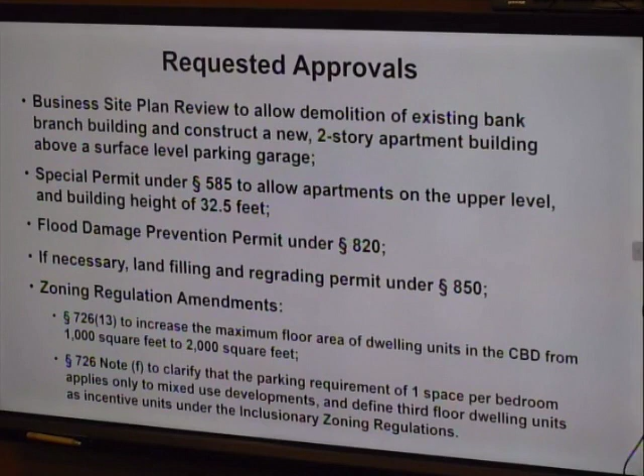But anyway, we're at business site plan review, as Fred mentioned, for the demolition of the existing Bank of America branch. A special permit under Section 585 for the apartments on the upper level, and building height of 32.5 feet, under the incentives available under the Inclusionary Zoning Regulation. A flood damage prevention permit—as Fred mentioned, this site is entirely in flood zone A, but not in the floodway, so we can confirm that. And then, if necessary, a landfilling and regrading permit, but this is a pretty flat lot—there's really no appreciable regrading other than site preparation as necessary for construction.

The two zoning regulation amendments are as follows. One, we increase the maximum apartment size from 1,000 square feet to 2,000 square feet. This was our original request when some units were closer to 2,000 square feet; the largest unit now is about 1,600 square feet, so I don't know if you want to get us to lower that, but we're not proposing any units that are actually 2,000 square feet. Section 726—I'll get into more specifics. There's a clarification here, and I thought this would be a good opportunity to look at the parking requirement, because they've changed, and there's some statutory activity going on with parking in multifamily apartments and transportation zones, things like that.

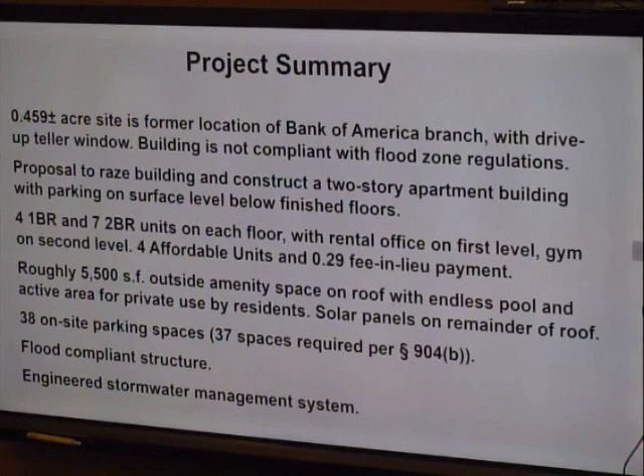And will actually reduce the volume of structure that's sitting in water during a major flood, because the whole under-structure is going to be an open parking area or open garage rather than an enclosed structure. And then obviously we have to do an engineered stormwater management system, which is also here.

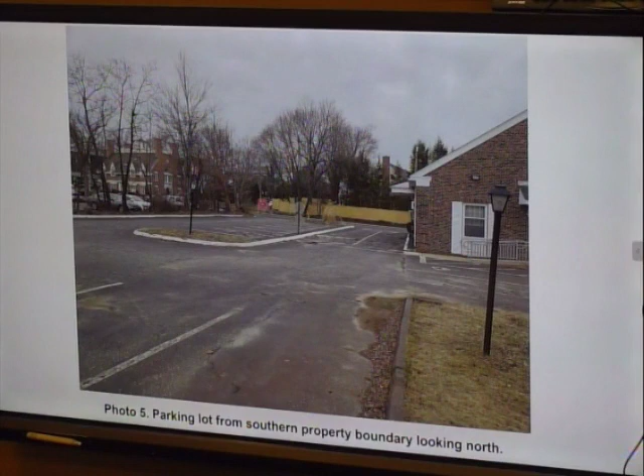Sedgwick is along this wooden, looks like a stockade fence or opaque fence of some sort. Houlihan Lawrence is over here on the left.

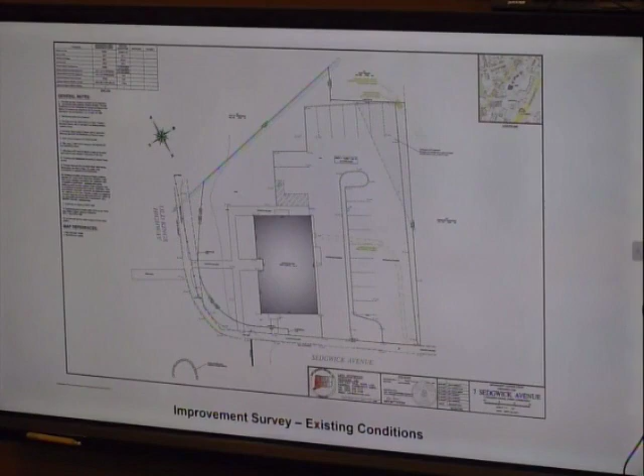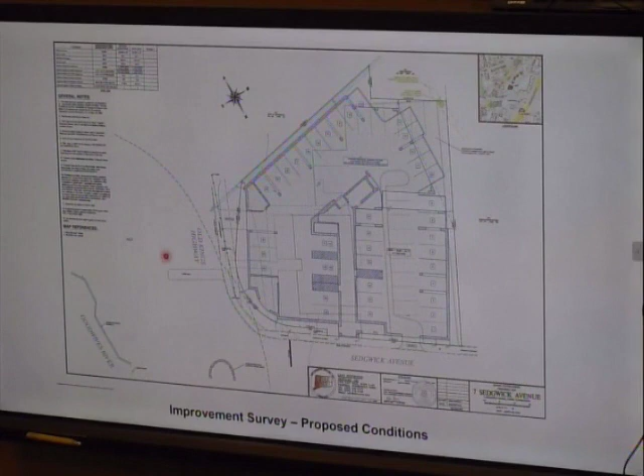Surveys, I'll go through these quickly. We don't have to spend a lot of time on them, but we have the zoning table up here, gives you the current information, and then we go to the next slide - you have the proposed information up here. Everything complies with the setbacks; we're really dealing with special permit issues in this application.

Most of the site is impervious, existing as it is in the proposed. The existing site has no stormwater detention on it, has a few catch basins that directly pass into the town system. We're proposing to capture all of the roof area as well as the small areas of uncovered roof right there - and all of that will be routed into underground detention systems. One that Bob's highlighting there, and then it overflows into a second system before overflowing into the town system. We do have an outlet control structure on there, on the outlet end of that second system, and that will act to control the flow out of the site.

So for all storm events, Darien requires the 2 through the 50-year storm modeled. We're reducing the peak rate for all of those storm events while also providing treatment of the runoff from the site - a fresh meadow approach. Exactly. So the existing conditions are modeled as if this was all grass. We don't take into account any existing impervious, although the reality is that the existing site is predominantly paved.

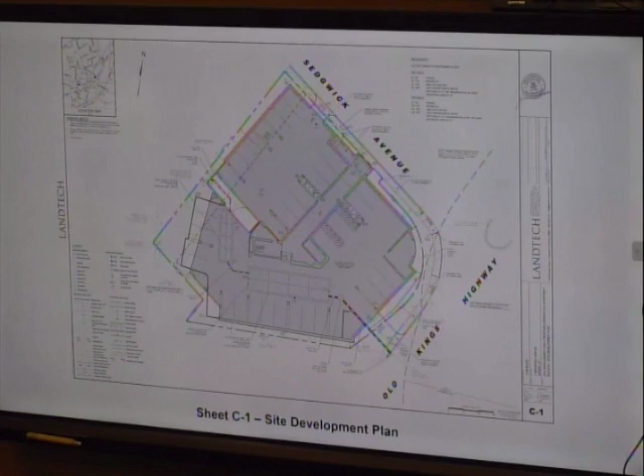We did receive comments, as Bob said, from Joe Canis, many of which pertain to the stormwater, but we've reviewed them and we feel they're all easily addressed. We will address them, have a full report and revised plan accordingly before next hearing.

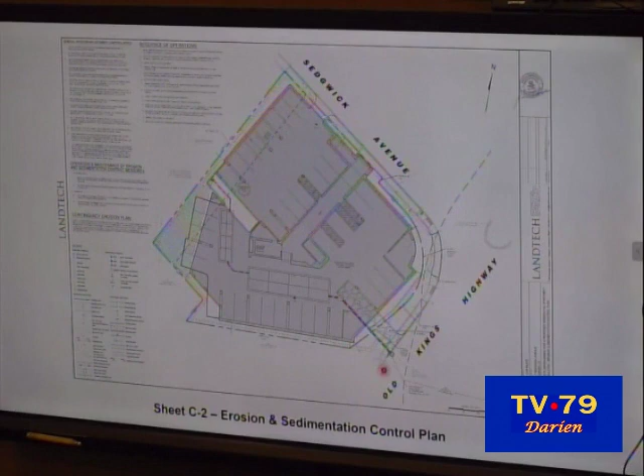Thanks, Bob. Soil erosion - obviously most of the site is taken up by building, so silt fencing will be provided around the entire perimeter of the site. The catch basin on Old Kings Highway that we're proposing to connect to - they'll be putting a temporary silt sack in there that'll prevent any type of material that may make its way off site from getting into the town system.

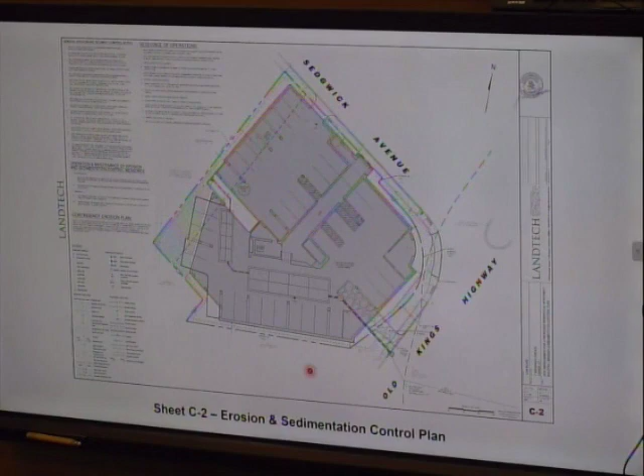Flood-wise, the last thing I want to hit on is the existing building, obviously not FEMA compliant. It's a large mass, removing potential flood storage on the site. Our proposed plan here elevates the solid walls above and provides essentially full flood storage on the property, so in the proposed conditions, there's an increase in flood storage provided as compared to the existing conditions.

What exactly do you mean by that, flood storage on site? So in the event of a flood, as Bob mentioned, the previous building - when the flood comes up and makes its way into the building, that mass of the building, think of the three-dimensional space, is removed, that volume of water that could have been there. Because our building is elevated above that, below is all open - the water can freely pass and equalize in there, thus we're not removing the storage on the site. In your calculations, did you assume there were 0 cars in that space?

Yes, that would be the presumption, but there would be some cars, though it would be a wash. Typically you do modeling for zero cars, since every space is filled with a car that has mass and could be shifted around, forced against walls, displacing water you think you can store and pass through. That may not be the case with 40 cars in there. Typically the analysis is based on solid, permanent walls. In a serious flooding event, cars would likely be evacuated, but the analysis could be done that way. The typical analysis is based on fixed structures like foundational walls, that's the assumption.

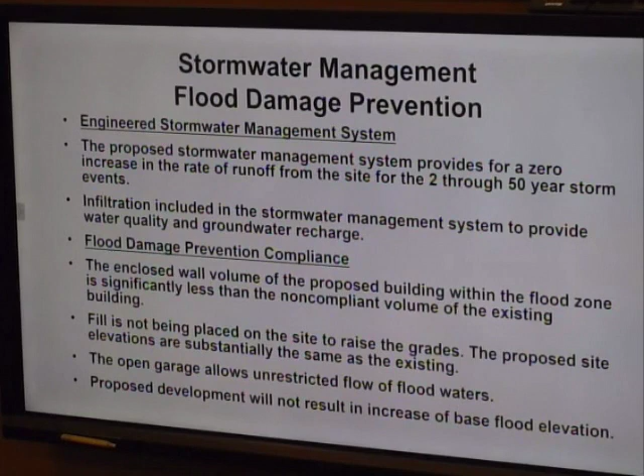You keep calling it a large, massive building, but it's only 2,000 square feet. From a volumetric standpoint, yes, 2,000 square feet, and the rough elevation of the site is 44 and a half, with base flood at 48 and a half. That's a fair bit of flood storage. Looking at the whole area versus our site, that's all we can control - we're providing substantially more flood storage than what's there now. There's none there now, but it's a 2,000 square foot building. He's saying he had to do cross sections - you'd have almost 4 feet of standing water versus just this area for the pylons in a 100-year storm event.

I don't have it here, but do you have the square footage of the lobbies and other enclosed areas? We do have those, but I don't have them on hand. Mark Andre will be following up and can provide that, or we can provide it after tonight's hearing. That's going to be a net - you have at least 500 square feet. The lobby areas, because we're providing flood venting to meet FEMA compliance, when floodwaters come in those lobbies will fill. You'll lose some space for the thickness of the walls, but the lobby itself won't be a full mass taken out of flood storage. Same goes for other enclosed areas below base flood elevation. So there's flood vents in the lobbies and staircases? Yes, all enclosed areas need to meet the flood opening requirement.

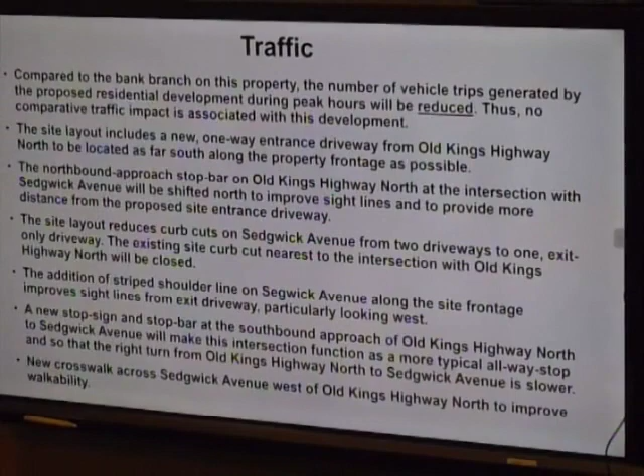Next, I'm going to go through some of the other things we looked at. As you've seen on the site plan, there's going to be one entrance and one exit. The proposed entrance is proposed to be from Old Kings Highway North, and we're locating the entrance driveway as far south along the site frontage as possible, really as far away from the circle intersection at Sedgwick as possible.

We also looked at some common sense improvements that would make sense directly off-site adjacent. One thing we looked at is potentially moving the stop bar on the northbound approach of Old Kings Highway North at Sedgwick, moving it a bit north, which will move it further away from the proposed entrance driveway. That'll also benefit visibility at the intersection, because that northbound approach would simply be closer to the intersection to see eastbound and southbound approaching vehicles at Sedgwick. So we thought that made sense.

Back to the access, the site egress is proposed to be at Sedgwick Avenue. In fact, we're actually going to be reducing the number of curb cuts at Sedgwick from 2 to 1, which is an improvement.

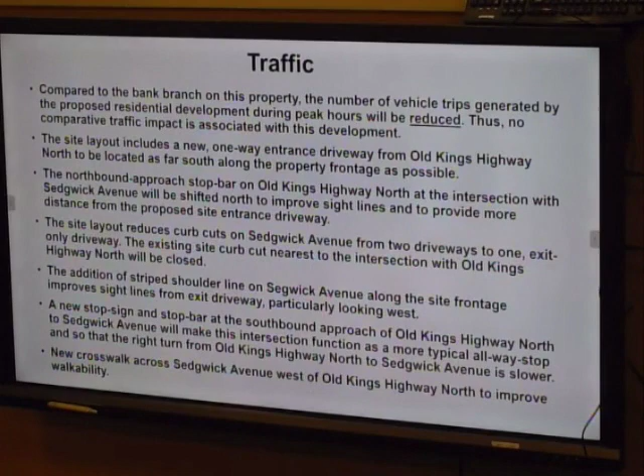Tied to that, one thing we're proposing on Sedgwick is to stripe shoulder lines on that block of Sedgwick. I'll show an image of this in a second. That'll have the benefit of better delineating the travel ways on Sedgwick, moving regular vehicle traffic a bit further away from the sidewalk, and also helping the site egress as well.

It'll essentially create, on the south side as you see right here, a 5-foot shoulder, so that a car right up against the curb won't be traveling there. And for motorists exiting our site, they'll be able to edge out a bit more to better see approaching traffic and egress from the site, turning left or right out of the site.

So they enter in off of Old Kings Highway and exit out of Sedgwick? Correct, one-way flow. Within the site, you'll be able to— just want to make sure I'm interpreting it correctly. Can you exit both directions onto Old Kings Highway and go right into the municipal parking lot like you can now? No, you cannot exit that way. It'll be one way in from Old Kings Highway and one way out to Sedgwick.

We're also proposing a couple striping and signage things at the intersection there at the circle. Proposing to put in a stop bar at the southbound approach, which we think makes sense, really to slow down vehicles so they don't make that southbound right turn whipping around the corner, and to allow the intersection to function more as a typical all-way stop-controlled operation.

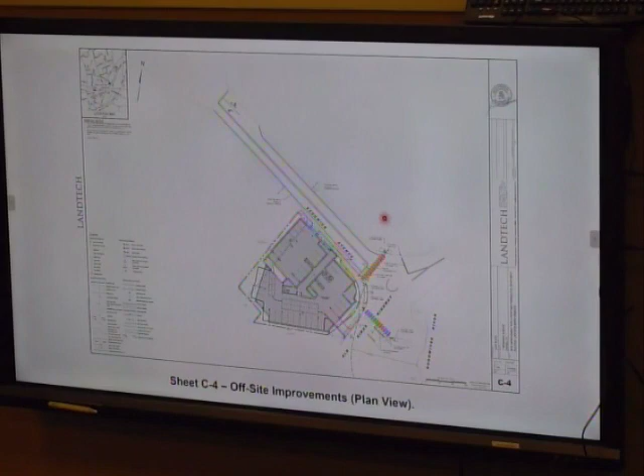Before you move on, let's ask you a couple questions. Coming out onto Sedgwick, I can go left and right, so I'm crossing the double line. You could take a left or right out of the site to Sedgwick. Is it safe to go out and make a left and cross a double line?

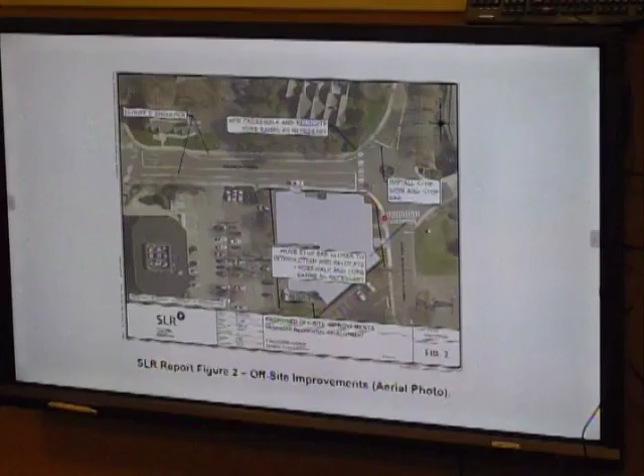Isn't there two ways there, right? The driveway will be one way. Sedgwick is the two-way street. The double yellow line in the middle of the street is what I'm talking about. Just like any other curb cut, you could take a left across the double yellow center line.

But I'm asking if it's safe. Traveling in a vehicle, I never use the word safe, but we look at things like sight lines. What we're trying to do is, to take a left, you're going to be looking to the left and the right in order to cross or enter both lanes of traffic. So looking right, another benefit of adding a stop bar and stop sign on that southbound approach is so that approaching vehicles will be slowed, in essence.

So you're looking out of the driveway to the right, to the circle. You can only see as far as the circle. So the other end of the equation is you want to slow approaching traffic, and that stop bar helps to do that. Looking to the left, we're maxing that out towards the signal, and by putting in a shoulder there, someone exiting the site will be able to better creep out, essentially edge out to a point where they can better adequately see approaching traffic, where you cannot necessarily do that without the shoulder, because there could be cars traveling right up along the curb line.

I've just never heard a traffic engineer call it creep out of the property. Creep out, edge out, it's not a technical term, but you know what I mean. That's the new one. Now I don't know if I answered your question.

Going in on Sedgwick, going in on Old Kings Highway, you got traffic coming in from both directions, right? From the north and from the south? Because it goes one way after that? Now tell me about that, because you have 40 or 38 parking spaces in there.

Well, it would function like any other driveway. Cars could take a left or a right in. There's stop signs here, every here, stop bar. There's another one back here, to our south.

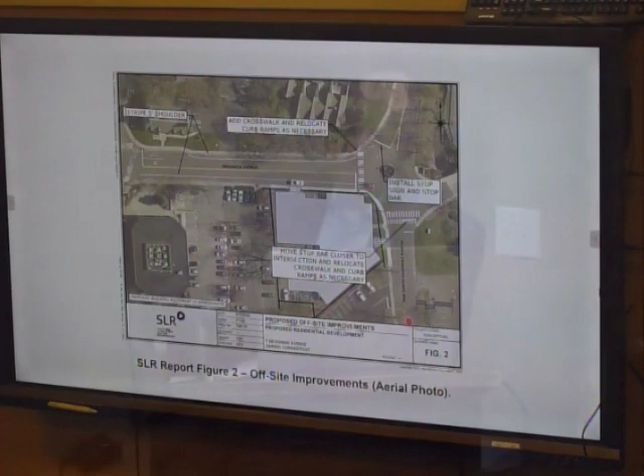But that doesn't really necessarily affect our driveway ingress. I don't know what else to say. I mean, putting in a stop bar at the circle intersection will again help stop and slow southbound traffic. Approaching traffic going southbound will stop, then have to maneuver around the circle as they do now, which naturally slows traffic.

Eastbound traffic has a stop. They'll have to take a right turn. That's not going to be a fast speed, and if you want to enter the site, you just enter it right there. The fast speed's going to be the people that are going from the Post Road to Goodwives Shopping Center. That's where I drive fast.

And then you got a guy coming out making a left. How many parking spaces were in the old bank branch? Part of the problem I have is the bank branch that was there has been closed for at least 4 years. So you're referring back to something that is not even a use anymore. It's not even grandfathered, it's been there, empty. So another bank couldn't go back in there? No. That was one of my questions: in your analysis, what was your baseline usage on the existing site?

Which is nothing. In reality, you might say I pulled bank data and typical bank traffic has inflows and outflows of X, but in reality, what has been there has been zero. So I guess that's what you're hearing from Steve. A bank could not go back as of right, so to speak. So the level of crashes or traffic that people feel now is currently at an operation zero level on that site, where in your analysis, I'm sure you rightfully thought it had bank operations of X level of inflows and outflows, and it did in the past.

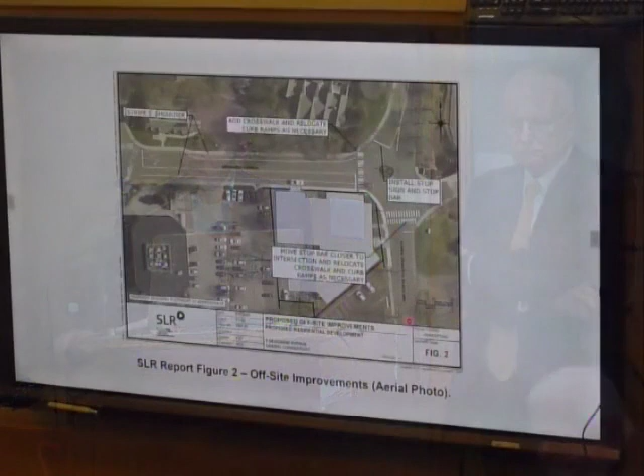Do you have any other signage or anything on that road to let motorists know that oncoming traffic might be approaching? I'm not sure I follow, what do you mean oncoming traffic is coming in their face, where are we talking about? Just before your entrance to your parking, on Old Kings Highway North. Old Kings Highway North is one-way traffic right now. And essentially because that lot south of it - it's not the Mechanic Street lot, it's one way.

Part of it changes from one-way to two-way via the curb cut. But because nobody's there, it's essentially just a one-way street, so motorists don't expect traffic to come at them head-on. It's one-way southbound here, heading northbound, then it turns two-way. So the one-way southbound traffic has to take a right here, but they're not aligned with the northbound traffic because of this bump out. You might see a headlight, but that shouldn't be unusual if you're driving around a downtown area.

Right now, that would be unusual. It would be weird - a motorist right now would not anticipate it. How is that not unusual when it's existing? Because nobody drives that way. When did you visit? How could you say there's a lot of traffic when nobody drives that way? It's one-way going the other way, one-way northbound.

When did you observe this? What day did you visit the site? I've been out there several times, last week and this afternoon as well. Was the traffic count done? We didn't do existing traffic counts because this is expected to be a less intense development than the prior use.

There was no prior use comment. There was a bank, about 4 years ago - not that long ago. I thought there was a count on the Friday after Thanksgiving during COVID. That was from the first application? That's what the remarks I saw indicated - I think we might have looked at existing state traffic monitoring data.

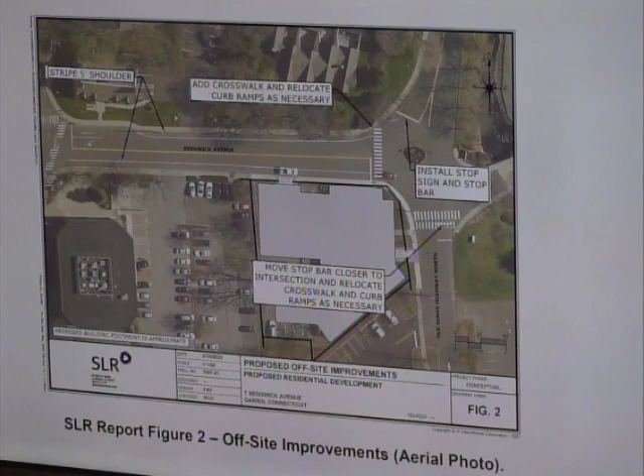So right now there's no loading spot for me when I move into the building, correct? On site, correct, I don't believe so. And there's no spot for an Amazon truck, FedEx truck, or UPS truck to go to. What's the height of the parking garage? Can an Amazon truck or FedEx truck come inside the building? The architect will look at that. We don't even know if a truck can fit in the building.

I don't want to speak out of turn, but I think it depends on the height of it. 8 feet height, so obviously a box truck is not going to fit under the first floor. Okay, so where are you thinking they're gonna park?

We got to talk about that, they seem to have a way of pulling up alongside the curb no matter where they are. I'm not gonna let you design something that's illegal. It doesn't mean it's illegal, it's just the way they do it. We rerouted Maplewood to do it specifically for that one specific reason.

You were the lawyer on Palmer's. There's a parking loading dock on Heights Road. We redid it, yeah, it's not there anymore. Don't deny it, you were the lawyer that represented them. That's a whole different project, mixed use, much bigger. It still had it on the street, and we said no, and they moved it.

You knew this question was coming. Is this your first round of answers? We're just getting to the hearing. We saw the same thing 3 years ago, comments from the peer reviewers on this. No, we saw it as a pre-application 3 years ago, before they went to ARB.

This fixture, it's very, very low level lighting. I wanted it to spill a little bit onto the sidewalk. It's downward pointing, 3000 K, so it's got a warm tone to it. Typically don't use this fixture that often unless I want something just very low with no spillage out to the road or beyond that.

I think that's it, if there's any questions. I would like to just get, I know David and Genevieve are trying to probably get a survey of what the trees are that are coming out.

Sure. Because I'm looking at the survey that we have from the property that was done by Land Surveying Services, the trees don't show up on here. And then on yours, it doesn't show up either. I could show them on my plan and then highlight them.

Usually we put a circle on them and an X on it, so this one's going down, but it'd probably be like a dark blue, so they would show up. Okay, yeah. Because just looking at the aerial, there's 3 or 4 along Old Kings Highway.

And then what do you do with the ones between you and 800 Post Road, over here? Are they coming out? Or are you replacing yours? No, they would stay. Those aren't ours, so those would stay in place.

So you're putting your bushes underneath their trees? Yeah, the existing curb is almost at the edge of the sidewalk, right through here. Right, and they've got trees along. In the back, yes.

So imagine that when this sidewalk goes in, there'll be some disturbance. We just want to make sure that we fill in that gap. Okay, so you're not going to kill their trees, are you?

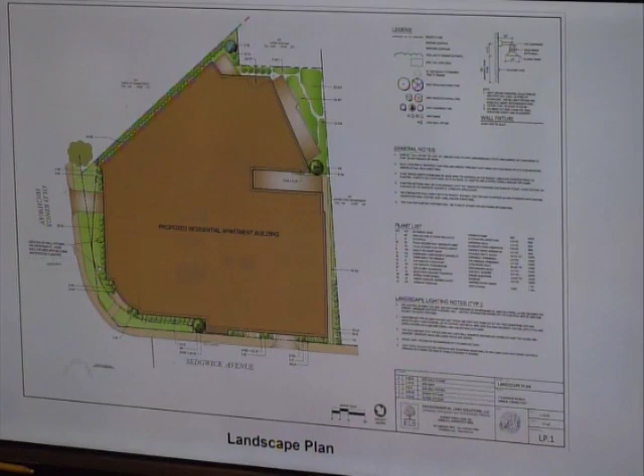No, again, we're only putting in just a sidewalk right in that area, and the asphalt line goes almost right up to the edge of the sidewalk here. So we're only really disturbing our asphalt area.

But so you're putting your bushes underneath their trees, so they're going to be shaded, right? Yeah, but they'll survive those right there. Again, they're not that tall.

Okay, yeah, they're on. I mean, you've been here 1,000 times, Matt. It's, yeah, I kind of trust you, but we could check you on that.

You're looking at two different things. You're putting brand new bushes underneath existing trees. But they're not, they go in at 3 feet high, I think, so they're not large trees that we're putting in underneath the existing trees.

So, but we'll look into that, and I do have those trees that are off-site on the survey. I'm looking at one that shows those. Not your survey, right? A different survey? The only one you have on here, I don't know, you're keeping it.

I have an old survey that's in the file, but I'm looking at, and I'll make sure those trees are on. So it shows maybe like 7 or 8 trees from here back through here.

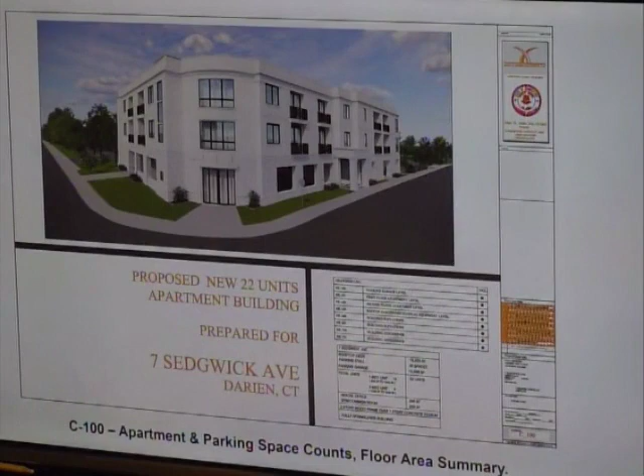From this lobby, you can either use the elevator or the staircase, and that will take you to the upper floors. At the ground level, or the parking garage level, we have one enclosed area here with the staircases and elevator lobby areas. Elevators per FEMA will have a float switch, so during a flood event, the elevator cab will not go down below the base flood elevation.

Do you have hydraulic elevators? We haven't made any decision yet on what kind of elevator will be installed. But regardless, it's an electronic switch, so basically in the pit, if it floods, that switch will prevent the elevator — if you call it, it will not go down. Right, it kills it essentially. So you don't know if it's hydraulic or electric? We haven't selected what kind of elevator yet.

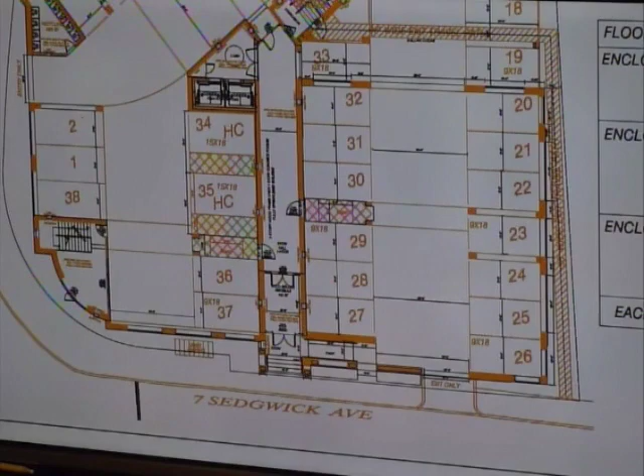Can you help me with the laser pointer so we can zoom in on this little area? Okay, this little pocket here, these were all the mailboxes for all the units, built in. We're talking about the mailboxes.

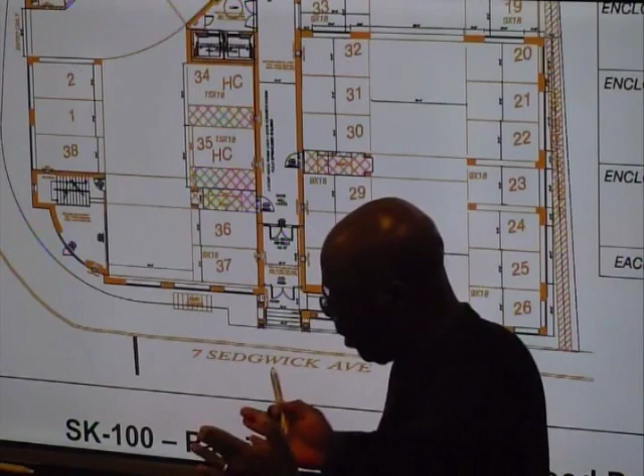Steps, ramp coming up. This pocket here, these are the mailboxes. They're built into the wall, outside in the elements. So if you stand in here, you're outside. So presumably Amazon will drop the packages right there, where the mailboxes are, right?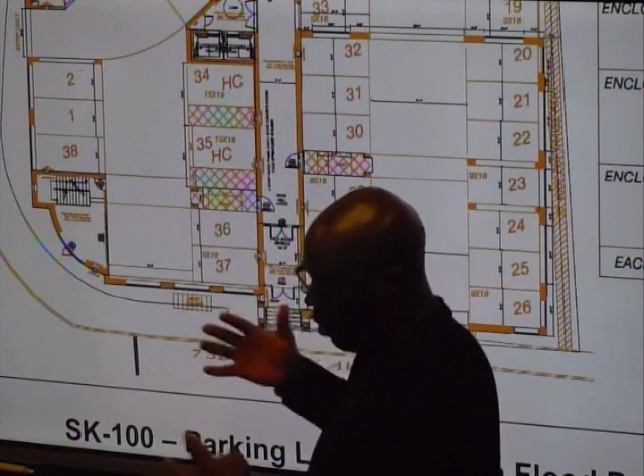Well, no. We would assume in the airlock is where they will drop off the packages. This could be secured, or just this set of doors. But they can't drop them in if those outer doors are secured, right? If these first doors are secured, then they won't be able to, since packages are outside. So I think this is probably something more for management to decide - do we want them to have access to this airlock, which wouldn't be a bad idea. I would have all of these access points with key fobs to provide secure access, and then this one I would just leave open. Or you could set it up where maybe during the day, at a certain time, these are automatically locked, so you have restricted access.

Is there an intercom system you're planning for this building too? We haven't got that far yet, but I guess we could. Yeah, so to buzz someone else? Yeah, I would assume that would be typical.

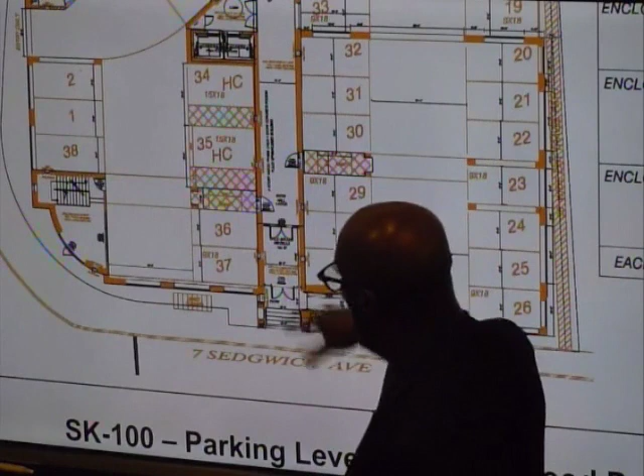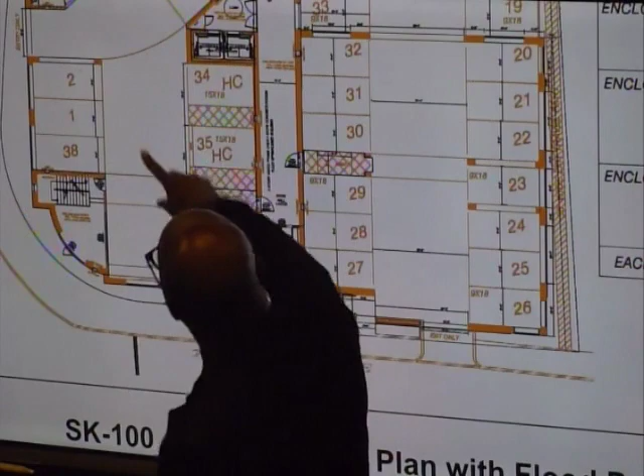I don't want to go into a lot of details when it comes to the flood vents, but when you look at all these airlocks, these flood vents are opposite of each other. In the lobby, basically in a flood event, you get water coming in this way, these flood vents will open automatically, and on the other side it'll be the same, and that will equalize the pressure. Same thing here in these staircases, and in this garbage area, same setup.

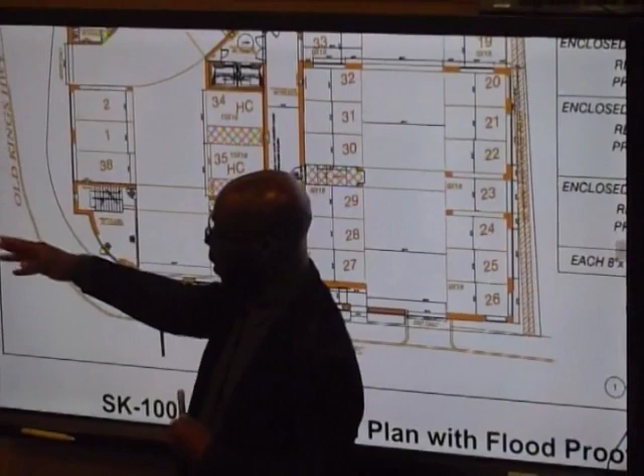So before we get too far, what's the use of that lobby? We're trying to create another glorified entrance to drive pedestrian traffic towards the Goodwives Shopping Center. If you're a resident, you can use the lobby and elevator coming down this way, or use the staircase to go down and then use the crosswalk to the shopping center and come back.

So you think people are gonna walk down the stairs and then go to Goodwives? Or you can go across, come up this way and go across the parking garage, then enter and use the lobby elevator because they want to carry bags. You have multiple ways to get to the upper floor. If you're able-bodied, use the staircase, fine. If you bring in a lot of groceries, come across and use the elevator.

You said a minute ago that it's basically 10-foot slab to slab, is that right? Correct. But measuring from the lobby is our reference point. Because the parking garage slopes, this is the highest part of the parking garage, and this is the lower section on Kings Highway, so we have a little bit more headroom there.

Okay, can you go back to this page? Sure. The covers, Steve? This one?

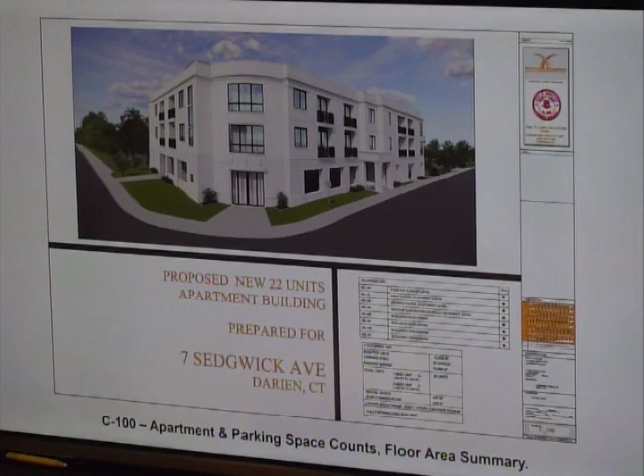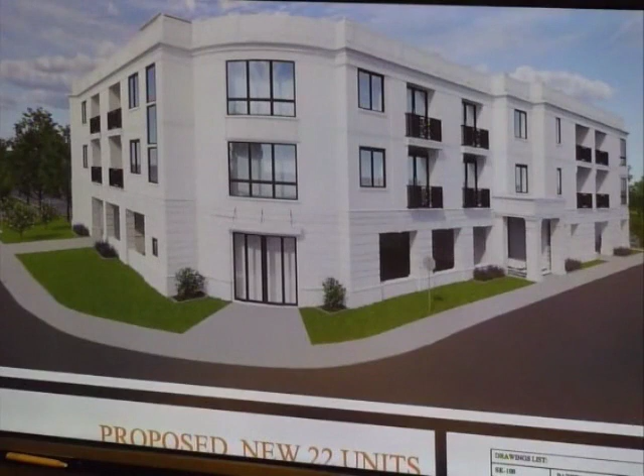I don't know what the sequence of your presentation is, but we're still on the ground floor. The entrance going into it, can you move the little red cursor to where the driveway is? No, the entrance into it, the one-way in. It's to the right, right? No, that's the exit. The one-way in is right here. Correct, that's what I'm talking about.

So what we're trying to figure out is what's the height of that opening. That might be a homework assignment. Because it's 10-foot slab to slab, is what we said, right? Yeah, and then drop down. I believe there's about a 2-foot grade elevation difference between the grade at Sedgwick Ave and at the entrance at Kings Highway. So that might be as tall as 12 feet. That could be, but we haven't taken into account the structural component.

That's fine, when you come back next time, I'm trying to figure out, are you trying to figure out whether we'd be able to get a truck under the building? Correct. That's gonna land up - your package room or refuse room is right inside that door, right? It is. So the garbage truck's going there. I can give you a height at the next meeting. I'm looking at page 2, everything happens in that corner. I can give you a height.

But he's gotta get out the other side. They're not gonna be able to pull in, they're gonna back in off the road and have a way out right there. Right, because we still gotta figure out where the loading spot's gonna be. Figure it out.

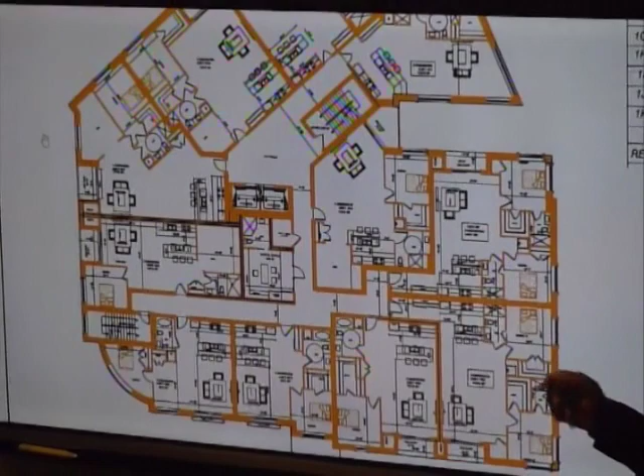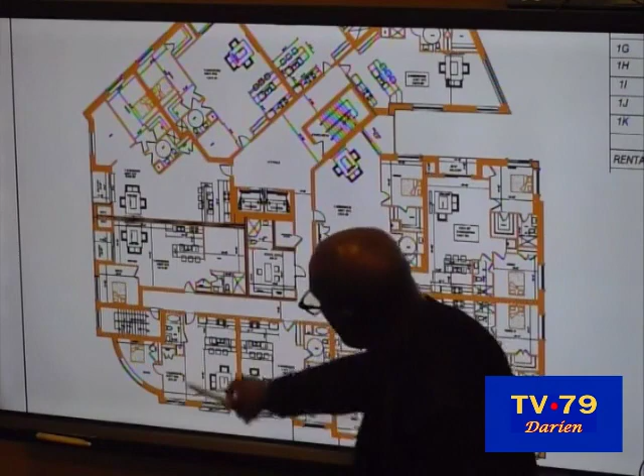We have a small gym on the upper floor. So the leasing office is on this floor. When you come up through the elevator or the staircase, you wrap around, so this will be the leasing office. There's another staircase, these are your main means of egress, and then we have 2 big elevators right here.

Do you plan on having somebody in the leasing office during business hours? I would assume so. So where are they parking? We have 1 parking space for the person in the leasing office. Is that included in the 38 spots? So 37 is required for the tenants and one for the extra leasing person, whoever that is.

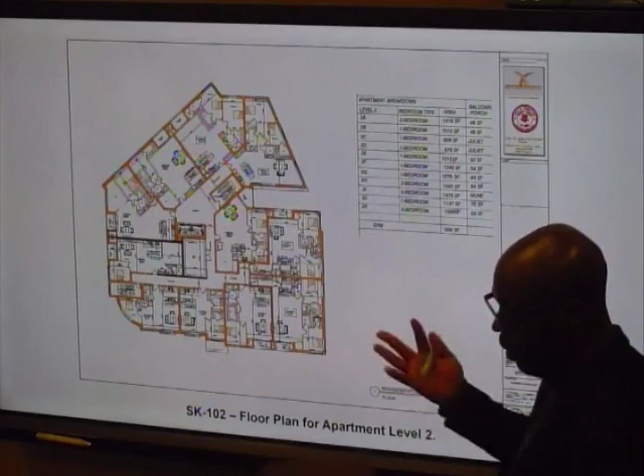And then the upper floor, Bob, please. I don't really need to go over all the unit makeups. We have a series of studios, 1 bedrooms. And then the footprint of the leasing office from the upper floor becomes a small gym with a skylight above.

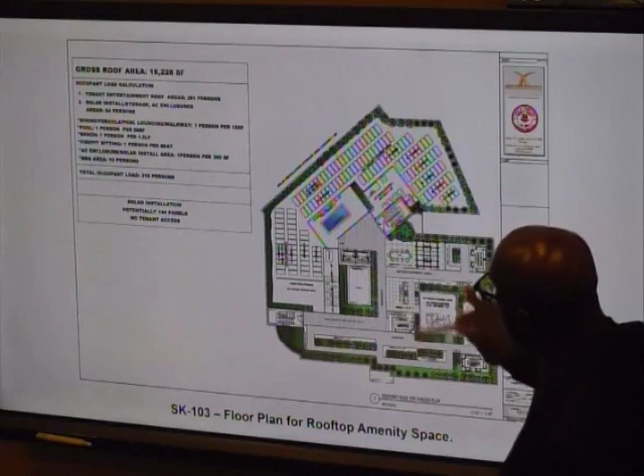Next floor plan. What we hope to do with the rooftop, about 1/3 of it will be dedicated for landscape area, entertainment area for our tenants. We'll have some seating areas for reading, a series of benches, outdoor areas, barbecue areas. And then we have this little pool area, that's where that endless pool Bob was referring to is.

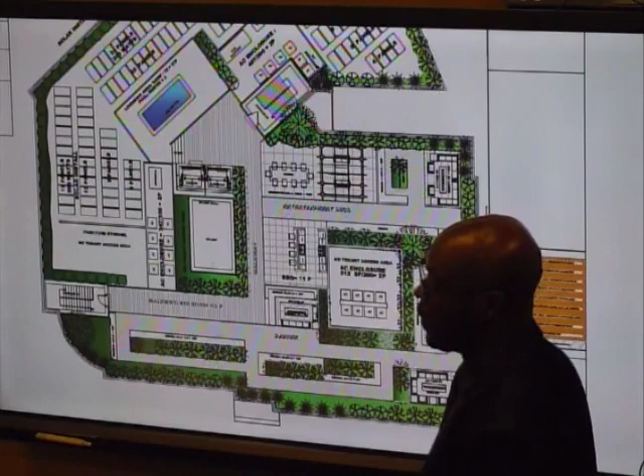That's only suited for 1 person, you cannot have 2 people swimming there. You actually swim against the current, that's what that pool is for. This would be our first rooftop pool in town? Believe so, I think it might be.

Some of the earlier comments related to the occupancy load, so we had a meeting with my office and the fire marshal, and we came up with the multipliers, the standard that will apply to our project. This is the breakdown for all of the areas, and that's how we came up with it. If you saw that 315-person occupant load in the fire marshal report, that's where that came from.

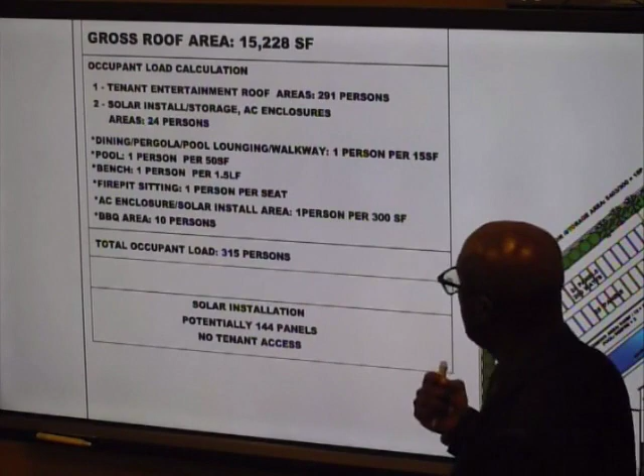And I think with that, the remaining areas will be used for mechanical equipment and solar panel installation. And I think that will be it for us, unless you guys have any additional questions.

Do you have the answer for this one? It says, with proposed occupancy load of 315 for the roof, where will vehicles park so as to not obstruct emergency access?

The parking counts and the occupancy load - you do the occupancy load to determine number of egress. That's the relationship between number of exits and the occupancy load. I don't see any part in the zoning regulation that relates parking count with occupancy load. We provide the adequate parking based on the use of the building, not occupancy.

Well, he's asking about obstructing emergency access - where will vehicles park so as not to obstruct emergency access? Yeah, but you're mixing two standards here. I'm just reading the sentence. We got that, but you're mixing anything. Yeah, but that's more like a safety issue - it has nothing to do with parking requirement though. The building will be fully sprinklered.

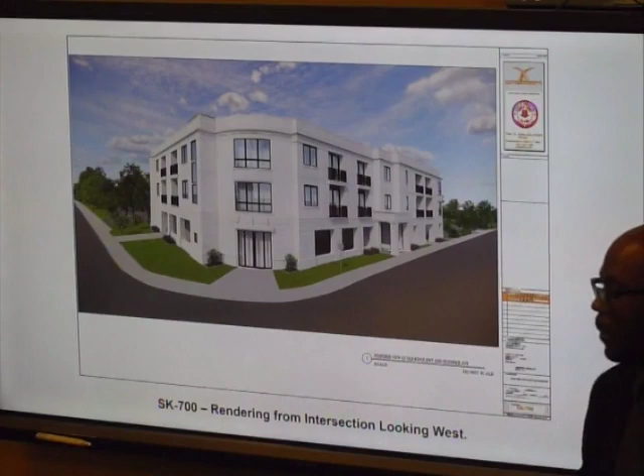Based on our occupancy load, we only require two means of egress, not three, not four, only two. I'm just reading his question from the fire marshal's comments - we try to address that. So these two, the parking count and the occupancy load, they're not correlated.

So the answer to this question is not even related to those - this comment doesn't relate to that. But that means the answer to this question is, I don't know. You would have to clarify - we don't have the answer for it, or at least as an architect I don't. That might be a question for Mr. Del Rio.

On the roof, these are wood slats - is that gonna be the base that they're walking around on? Yeah, so we were thinking wood paneling, different finishes to soften the areas and delineate where you'd sit for benches. Obviously, if we go forward with this project, we'll have more detailed plans on what kind of materials we're gonna put there - they'll have to be more durable. But we don't want it all uniform, obviously.

Question for Jeremy, only because it came up in an apartment I owned in the city - when you have noises on the roof over a certain decibel level, for the units directly below, there's usually some regulation. In our case the roof noise was from AC units that were too loud because they weren't on mounts or platforms, so the building had to lift them all up. So are we taking into account that same issue, since this is gonna be a heavy use roof? If you're living in this building, once the weather gets nice, this roof is gonna have a lot of people on it almost every night. Is there any consideration for the apartments directly below in terms of sound dampening or expected sound levels from all that volume?

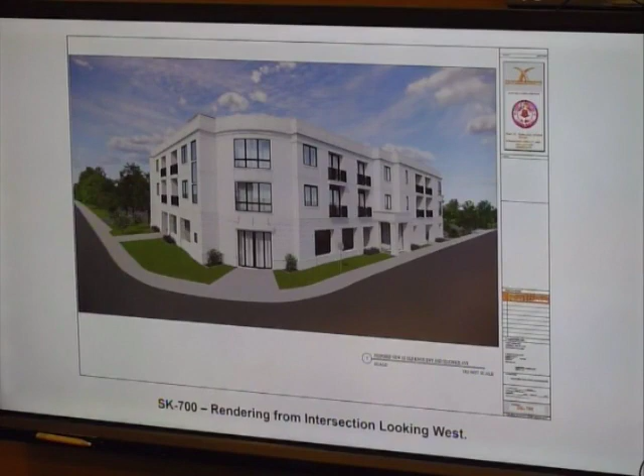Is the pool above ground? Right, it's not, the pool will be above the deck, there are a few steps up. If you wanna go back to that side, yeah, there are a few steps, it's above, not level to the deck, because it looks like there's an apartment underneath it, that's all.

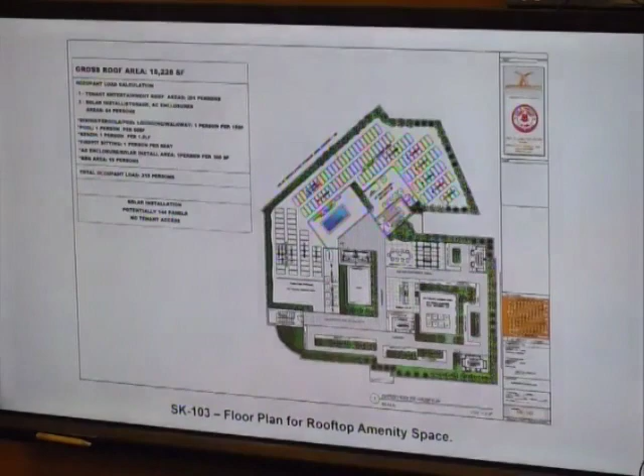No, the endless pool, imagine it's like a hot tub. Yeah, I know what it is, it's like a lap pool basically. So imagine that hot tub, that's how high it is, so that's why it's off the ground, a couple steps up type thing. Yeah, the steps are there, so that's why we have these little steps coming up, and then this is the pool, and then we have these little lounging areas around it.

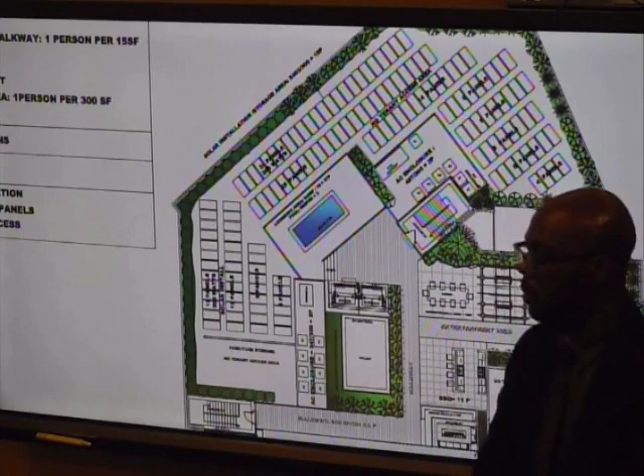Okay, with regards to this, at 34 Old Kings Highway for Baywater Properties, they can't use the entire roof, it's smaller. What was the regulation on that? There's a section of the roof you can't use, because it's not all usable. This isn't all usable either because of the solar panels, but is there a ratio that we used?

At 34, there's public plaza space, that's in the front of the building, it's not on the roof. I'm talking about the roof, Bob. I know that, but 2.5 times the plaza space is the additional area that you get on the 3rd level under the regulations that that building was built under.

Okay, you're trying to incentivize. Tell me the public plaza for 34 Old Kings Highway is up on the roof? No, it's in front of the building, but when you dedicate public plaza space, that's what determines the additional roof area you can use, you get an additional upper level, 2.5 times the area of the plaza space. That's the way that building was built, but it's all commercial.

Okay, I'll have Jeremy get the answer to this question, the inclusionary zoning incentive, which is a different way to look at it.

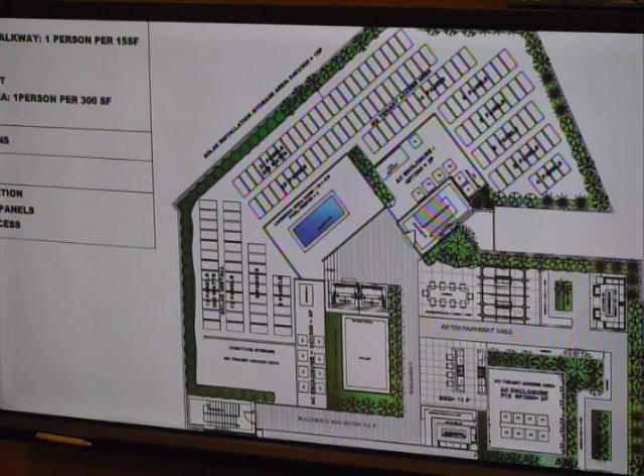42 inches is part of it, less than 4 feet, sounds like somebody could figure it out. We can make it 48 inches, there's no restriction. The minimum is 42, but that doesn't mean we can't make it 48. I'm not suggesting any number, but I would be very careful about that.

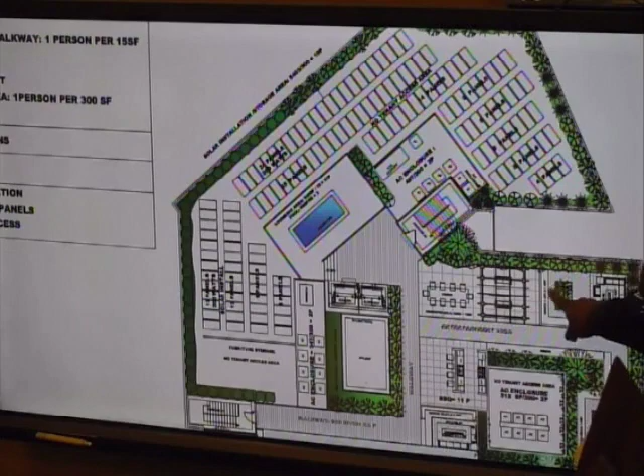I think it's more at the bottom of this diagram, because the solar panels, nobody's going off that. But if you zoom in, Bob, move it up to where your hand is. Even from the planting beds? There, that public right of way space, there.

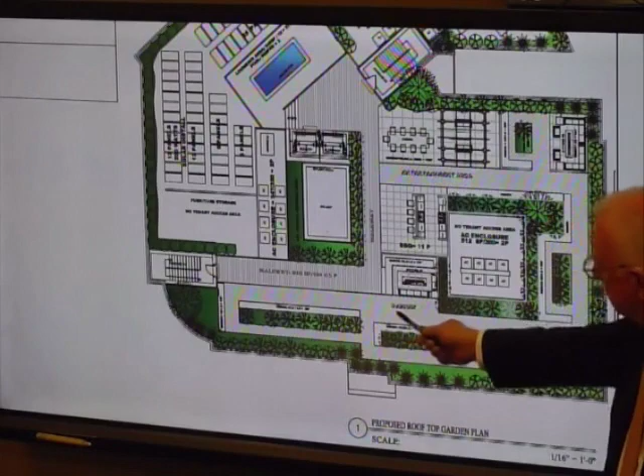If I think what George's question is: if you're at 42 inches and the platform itself is 6 to 10 inches off the ground, which platform are we referring to? The wooden deck right there that people are walking on, the decking. That decking is not going to be 42 inches above, but it's going to be some level above it, right? Yeah, 6 inches, that's what I think, decking, George.

Over here, particularly what's near the shrubbery and terrace. Down the bottom, Bob, the decking is going to be 6 inches over, right here. Oh, I get your point. So what we're saying is you're at 42, the decking is 6 inches off the roof, so you're really only at 36.

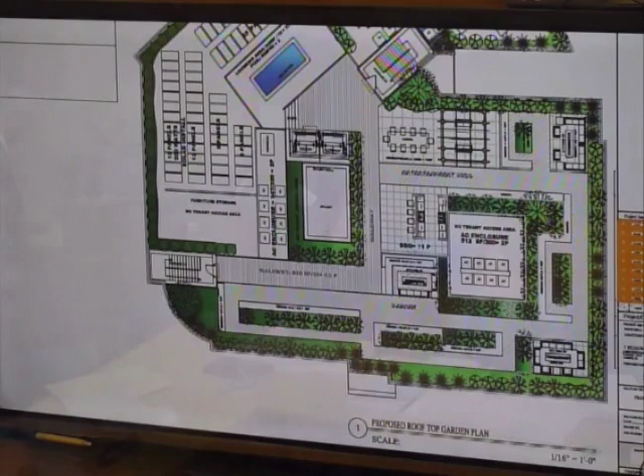It's 3 feet. So what we would need to do is provide the detail, because we provide the planting bed at the perimeter. So once we establish the minimum soil depth we need, from that safety surface, that's when you would need your point, 42 inches. Yep, that's the way it's computed.

With pool fences, the intent is to prevent young children from stepping over or climbing over them. Well, I'm more concerned about young children just falling off the building, not going into the pool. That's different, that's totally a different thing.

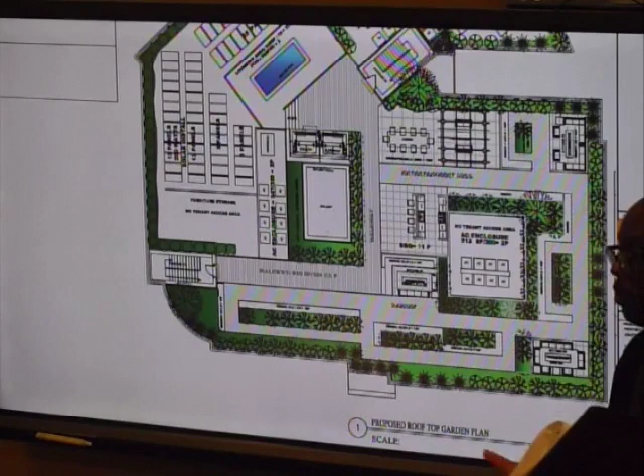This is the way I would like to put it to bed: unless the building height is measured to the parapet, this is how we will resolve this. If we need 6 to 12 inches of soil for the planting bed, and it captures that surface, you need a minimum of 42 inches. That's code. So if we decide to make it 48, it could be 48. But the exterior detail that we showed of the building with the parapet detail, that's what we're going to have. And if we don't do any of that, it doesn't really matter.

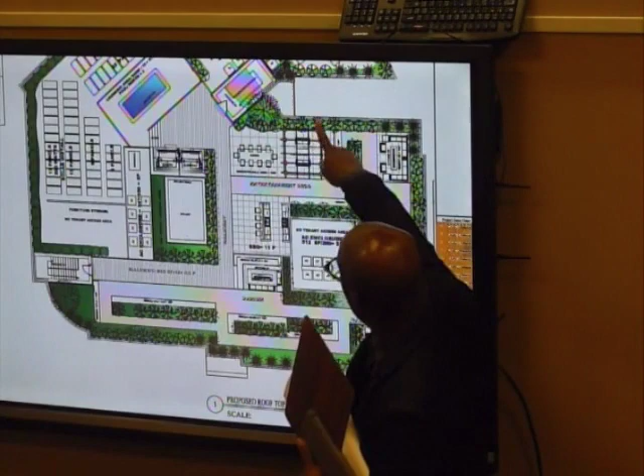Let me ask, that thing right there in the corner, what is that? Is that a table? I can't read that. Oh, there's couches and a fire pit, right, so it's a fire pit, fire pit seating area. This is just a pergola. This is the barbecue, this is a dining area. This is a fire pit with benches.

This is all benches. All right, I'm just trying to figure out the occupancy up here. You've got the table and chairs in the middle for 10 people, then the bar's got 4 bar chairs, then we've got 1, 2, 3 fire pits - one here, one here, and one here. 3 fire pits.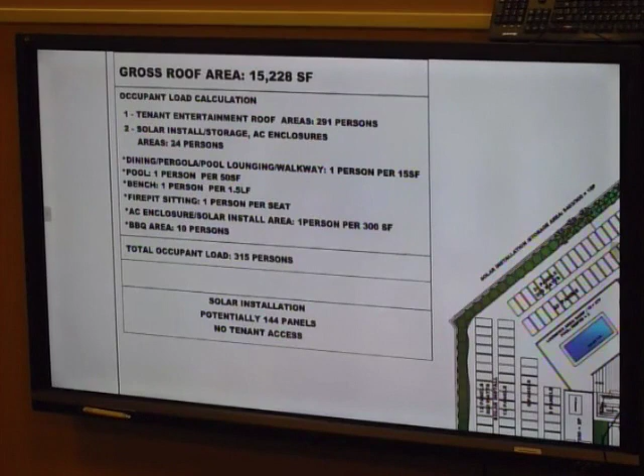So he's saying per linear foot. Right, I got it, yeah. One thing about this is it's got 24 persons on the solar panels. I can't imagine that happening. But that's what we decided with the fire marshal.

Okay, that's fine. But the question that I would like to know is, when my kid is sitting at that fire pit and the wall to jump over to go underground, how high is that?

That's what I care about. So if it's 42 minus, no, it's going to be 42 inches from the finished surface of the planting bed. It has to be finished, by code. So if the planting bed is 18 inches, plus 42 inches, that makes the parapet 18 plus 42, that makes it 60.

Is that the height of the building, or the depth? Do you have to measure to the top of the parapet? No, our code would require us to measure to the flat roof.

I'm more concerned, if you look at Walgreens, you want yours to be able to screen the mechanicals on the roof, and part of the solar panels, for the safety factor. If the mechanicals are on the roof, as Mark shows, they'll be up a little bit and only 3 feet high, so the parapets will block almost the entire view of the mechanicals, and similarly most of the view of the solar panels.

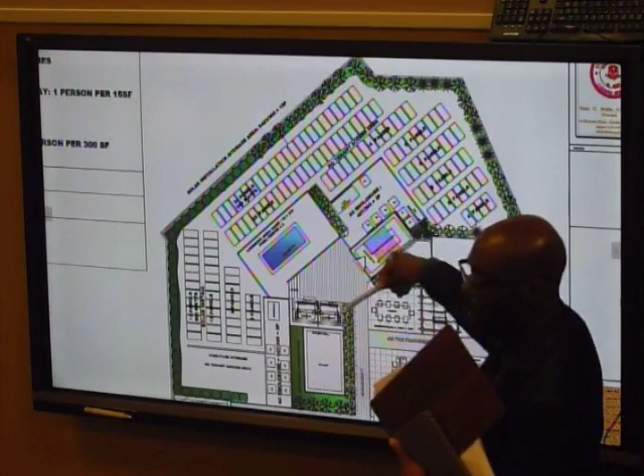Just one more - it looks like the utility, solar panel, and storage area is all walled or fenced off, correct? I didn't see any gates to access service. How would you get to service? So we would have a gate here and another one here. So that's where the 2 gates are. From here we're not providing access to this area, but we could. From this gate you'd have access to the pool equipment, and there's a set of condensing units in here.

Do we need access to the solar panels for maintenance? You'd go from here, walking all the way around. And here we have furniture storage, so there'll be a gate somewhere at the end of that walkway at the bottom, since from here you can have clear access. But we can provide multiple access points, it's not an issue.

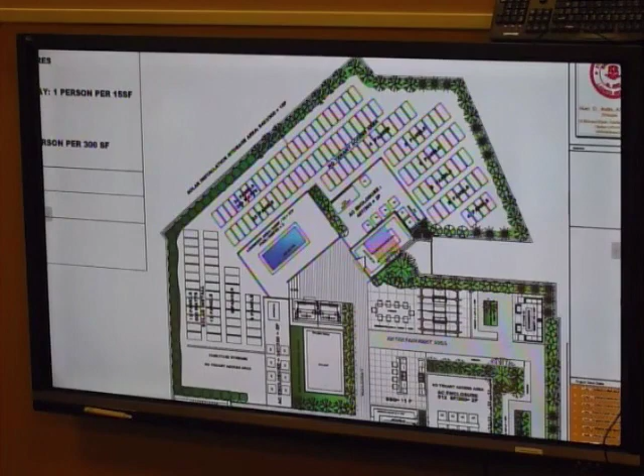Is there a generator involved in this structure? Yeah, a backup generator. Where is that? Corner of the pool, right up there... down there. Yep, right here, that's why we have so much space between.

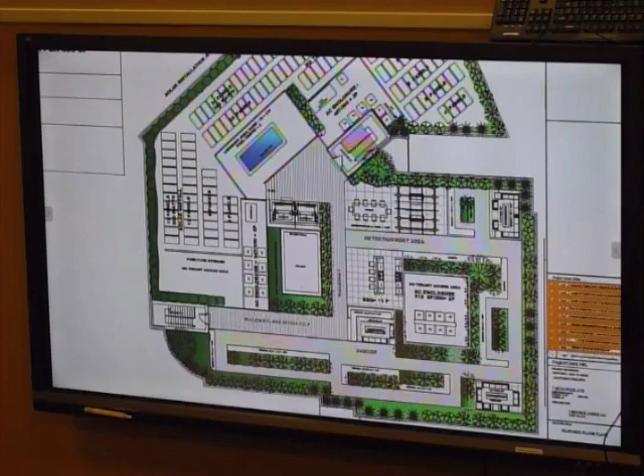That backup generator serves what? That would be for the elevators and common hallway lighting, for safety. And then the condensing units, we have 3 areas - one here, and one here. You haven't sized the generator yet, then? Not yet, probably gonna be gas, most likely.

How dependent do you expect to be on the solar panels? I think some of the issue with the solar panel is they would only have to provide electricity for the building owner, not necessarily for the tenants, but I'm not sure yet. I think that's the way it works. So he could potentially just sell that back to the grid, and none of the tenants would see any savings on their Eversource bill. I think the issue is with the utilities company.

Yeah, we had solar panels on top of the Royal. I think it just does common areas, for building maintenance - the common areas, just for the building owners, not for the actual tenants. Sort of the same as the generator, though. Well, the generators provide power backup for the 2 elevators and common areas, meaning hallways and some emergency lighting in the parking garages, that would be stuff like that, so people can easily get in and out. But that would not provide lighting and electricity in each unit. Gotcha, you can't run your dryer on it. Right, yeah, that's not the purpose for that.

And Jeremy, how do we handle elevators on top of roofs, and chimneys, relative to the height of the building - is that architectural detail? We'd have to look at the section of the regs in the 300s to see how the elevator shafts are treated, I think they're exempt, but we'd have to take a look. It's not a shaft issue, it's an elevator cab, so if Mark has a detail, we'll take a look at it. Does the elevator go up to the roof at 34 Corbin?

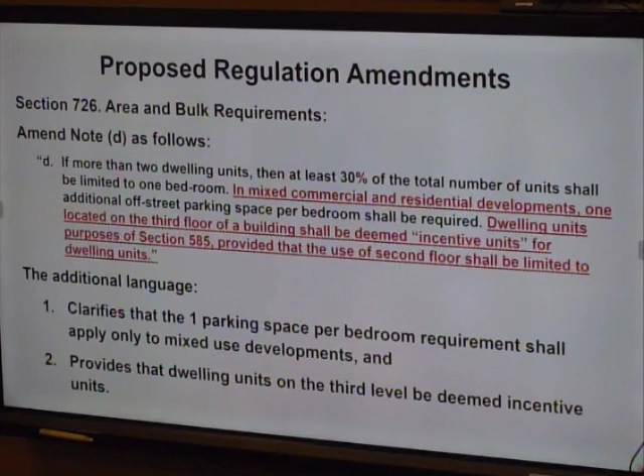I did the same thing in the neighborhood business zone, where there was this incentive unit, inclusionary zoning regulation that applies all over, but it didn't really specify in situations where you don't have specific density, what is an incentive unit. So what this change does is it takes the 2 levels and treats the first level under the 14% of your basic inclusionary zoning requirement, and treats the 2nd floor under the 25% incentive units under 585.

Did you follow that? I'm still trying to figure out what's the first floor, 2nd floor, 3rd floor, because now you just switched it backwards. Before he said the ground floor is the first floor, the 2nd floor - now you're saying it's the 2nd floor, the 3rd floor. So you're gonna make it 3rd? How tall is the building, is it 2 stories, is it 3 stories? Okay, that's not making sense, let's do it this way.

The lowest level - you're creating your own problem here. The lower apartment level is the subject, it's the 2nd floor of the building. Well, it depends if you count the garage as a floor. Under the flood regulations, the garage is not a floor.

So we're just making it clear - there's 4 buttons on the elevator, correct? So there's 4 floors. So the roof is a floor? Well, the roof's not a floor, and the garage is not a floor. You've got more people living on the roof than you do on the first floor.

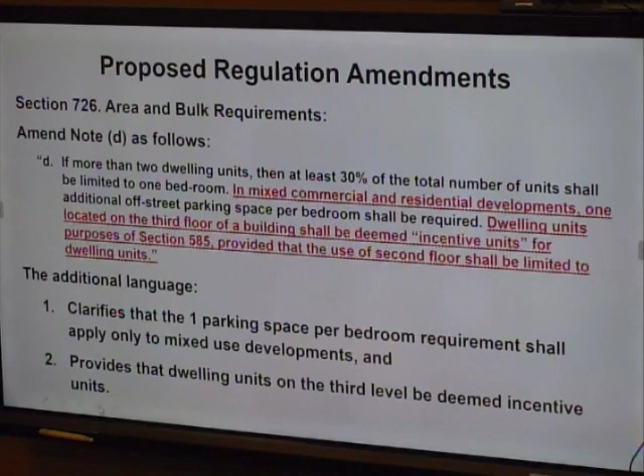Which building? I think there were two up there - 1987, or 1997, or whatever it is on the road. Right, so now you made that change there, now you're making another change here - it's a very similar thing, so you're making a change twice. You changed it there, and now we're changing it again? It's basically consistent with that - it makes it the same, because that upper level becomes the incentive level.

Okay? Now I can't - what's going on, oh here it goes. Come on.

So where in the town plan, conservation and development plan, does it say we should do this? And also go back to the first one, where you're changing it from 1,000 to 2,000 - where does it say in here that we should do this? I'll tell you in a second.

You gave us pages 97, 98, 103, 104. So - let's go with the first change you want. I quoted square footages from the design, basically the DBR zone. What page is it? It's on page 5 of my narrative. Right, but I'm looking at your pages in the back.

Right, but I'm looking at what page in the conservation development plan you're talking about. Well, these are citations to the zoning regs, and they're basically in comparison - this is a comparable increase to these other zones, to be consistent.

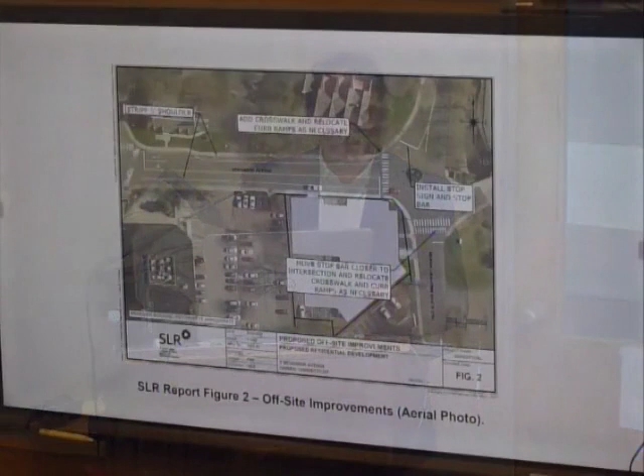I'm very confident that if you did do all of that, you would have a delay, an average delay, let's say Sedgwick going north to Post Road, which is one of the ones mostly concerned. You'd say maybe there's a delay today of 50 seconds average delay, it would maybe at best add a second of delay, I don't think it would even add a second. When you did the whole nine yards of running through a traffic study, it would go to 50.2 seconds. So that's the order of magnitude. Yes, there's an impact, yes there's more trips, we're definitely not saying there's not, but we don't expect there to be any major impacts or changes to general traffic in the surrounding streets.

So that's the traffic impact study part of it. I'll stop there and see if there's any questions on the traffic impacts.

Just my big thing is the Goodwives Shopping Center next to you, how that factors into it, because that's one way in and that's how you come out. I'm not sure what the concern is there. So you're adding another building that's got 22 apartments and 30 parking spaces. Let's talk about that relationship between parking and traffic for a second. That's the largest shopping center in the town of Darien, and they peak at different times.

Commercial and residential, or office and residential, peak at different times and in different directions. Parking for residential has the highest demand at night - everybody's home, everybody's sleeping, parking lot's full.

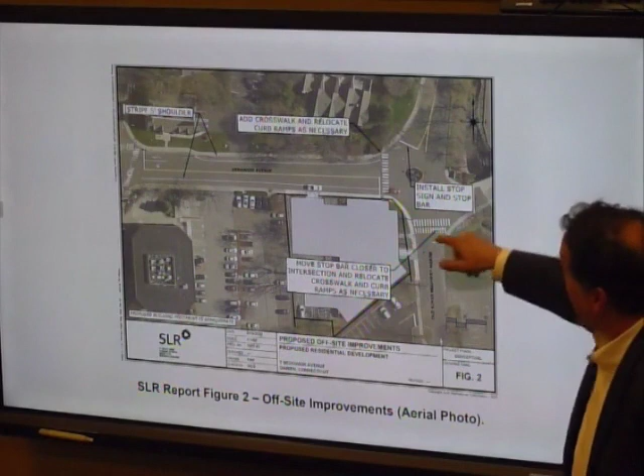You'd be kind of coming out at an angle, so your hands are tied as far as the way I look at it. You can make a right out only, but then you'd be forced into the mechanic lot, and that's not going to work, making everybody do that - that's not acceptable. So I think you're stuck with the clockwise sort of coming in on Old Kings and exiting, which is an improvement to today's geometry where we have 2 very wide curb cuts on Sedgwick and no exit or entry onto Old Kings Highway at all.

For many reasons, pedestrian safety is number one. In site design, we try to minimize curb cuts as much as possible so there aren't as many vehicular or vehicular-pedestrian conflicts. So while we can't get an in and out on one side, this is probably the next best thing, which makes sense to us.

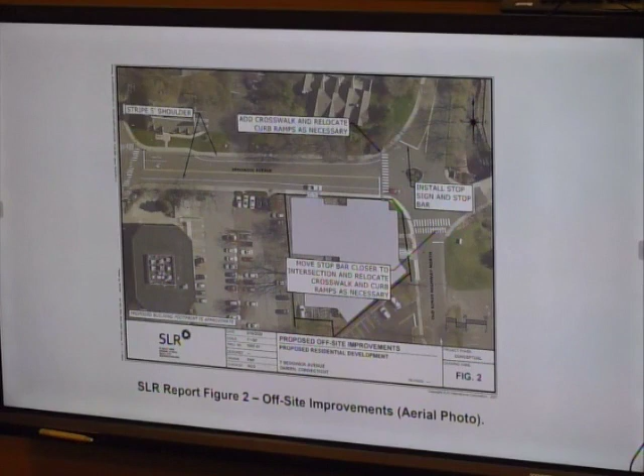Remembering the low volume of trips on exits, it's 6, 8, 10 cars. So on average, someone leaving the site during peak hour, that's 1 car every 10 minutes. They're not in a rush to get out, and if there are queues on Sedgwick during peak hour, that's the biggest concern, but it's a low volume in that order of magnitude, and not all of them are making lefts. At least a quarter are going to make a right and then maybe a left onto Old Kings Highway.

Why would I sit in that traffic? If I check Google Maps and Waze, it's going to tell me to take Old Kings Highway and avoid Sedgwick and Post Road traffic to get to 95 north. So it's not everybody making those lefts. Now instead of 6 lefts, we have 4 lefts.

I won't even get into the alternate routes. Why do you keep saying everyone's going to 95? I'm not saying everyone's going, I said a quarter maybe. I said not everybody's making a left. So some portion of the 6 get canceled out.

Are those numbers, 6 and 4, industry numbers you're getting from somewhere? Yes, those are ITE trip generation numbers, and we checked, we ran them, and we would have come up with the same numbers.

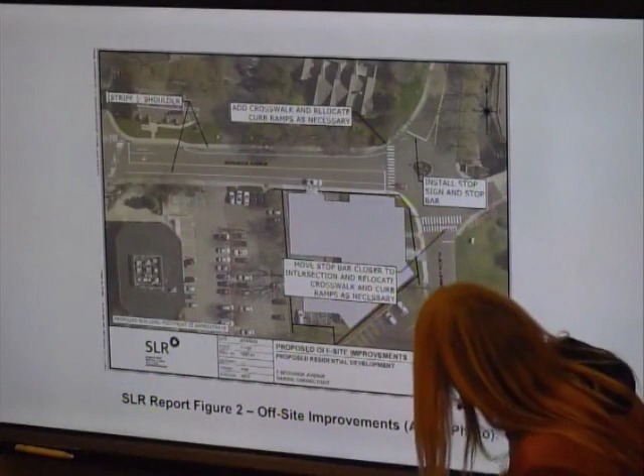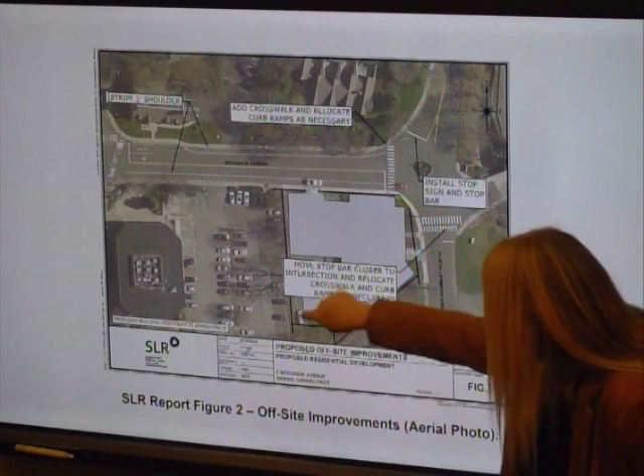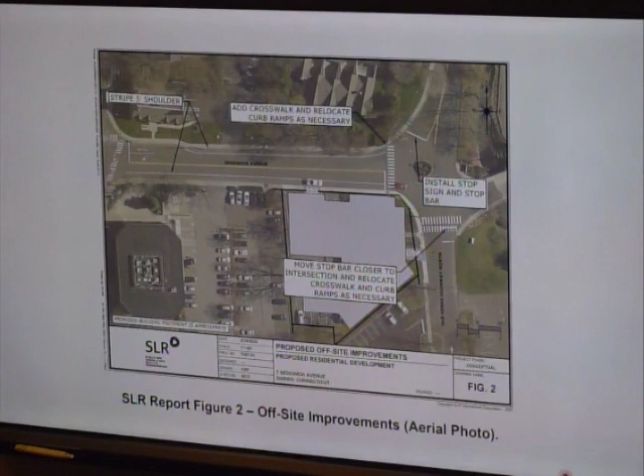I have one concern, or a few, that she touched upon. Huge, massive trucks already go through there for deliveries. How are we going to create space for trucks to deliver to this big unit? I don't think this is that wide, I drive here all the time, I walk my dog, I go around Mechanic Street. Can't they create a roundabout like every other place for deliveries? We're trying to figure that solution out so far. That's all I've got.

Bye, thank you Susan. Would anybody else like to speak? Sure. Welcome, just your name and address for the record? Yes, the name is Rolf Oben, 9 Archer Lane, Darien, Connecticut, RTM member, District 4, Public Works Committee, although I'm not speaking in the capacity of the RTM.

I don't know how aware you are about the sewage questions, the sewer situation still pending with regards to this development. I've watched a number of meetings about it, and it's a huge question because there's a junction of pipes that come together, some from this location to an area on Post Road. They've done a number of analyses, and right now they're saying that junction is pretty much at capacity. So there's a big question about whether this should go forward, it could very well put that over capacity, and that's not an acceptable option.

I'm going to stay in touch with the meetings as they go along. I think that's on their next agenda, and until that's resolved, I don't see how this could possibly go forward. This also opens up the question about development in general for the town, and the capacities we have in our infrastructure to support development. We all want town development, but we must be cognizant of whether or not we have the infrastructure to support it. That's all, thank you, sir, thank you.